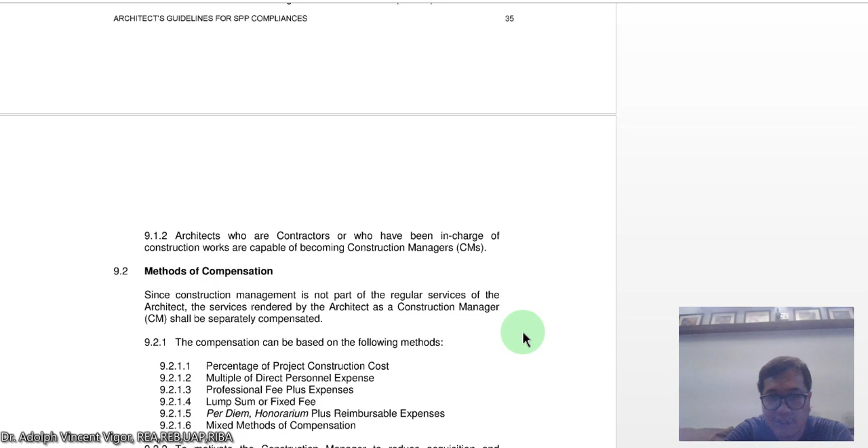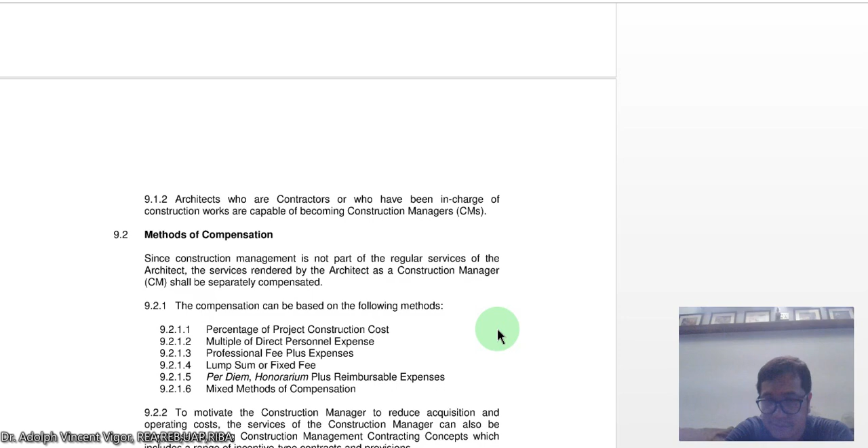For me. So managerial capabilities also could be learned if you already have a lot of experience. And preferably if you have a master's degree in management or a doctorate in management, it would help also. Then architects who are contractors or who have been in charge of construction works are capable of becoming construction managers. Of course, this is a given, because if you already have a lot of experience under your belt, then you're already capable of becoming a construction manager.

So what are the methods of compensation? Since construction management is not part of the regular services of the architect, the services rendered by the architect as a construction manager shall be separately compensated. So it means that since it's not part of the regular services, the services as a construction manager are to be compensated separately. The compensation is based on the following methods. The first is the percentage of the project construction cost, which is what we also do with the regular services.

Then multiple of direct personnel expense. Then professional fee plus expenses. We also have a lump sum or fixed fee, or a per diem honorarium plus reimbursable expense. And we could also do mixed methods of compensation. So it really depends on your agreement with the company or the owner how you're going to be paid if you're going to become a construction manager.

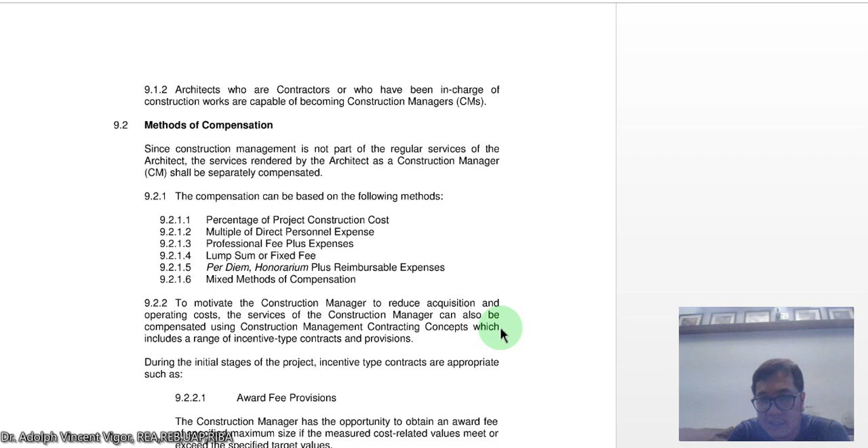So to motivate the construction manager to reduce acquisition and operating costs, the services of the construction manager can also be compensated using the construction management contracting concepts, which include a wide range of incentive type contracts and provisions. So these are the different provisions. During the initial stages of the project, incentive type contracts are appropriate. When you say initial stages, these are the early stages of the project. So there are two written here.

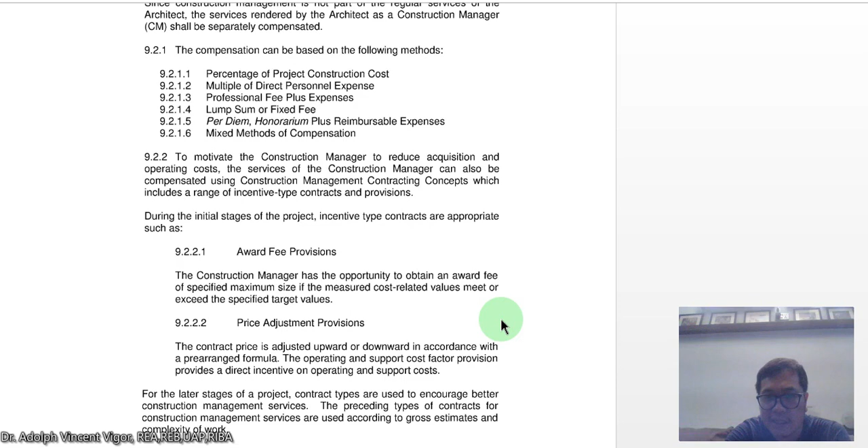The first one is award fee provisions. The construction manager has the opportunity to obtain an award fee of a specified maximum size if the measured cost-related values meet or exceed the specified target values. So that's the award fee provisions. The next is the price adjustment provisions. The contract price is adjusted upward or downward in accordance with the prearranged formula. So the operating and support cost factor provision provides a direct incentive on operating and support cost.

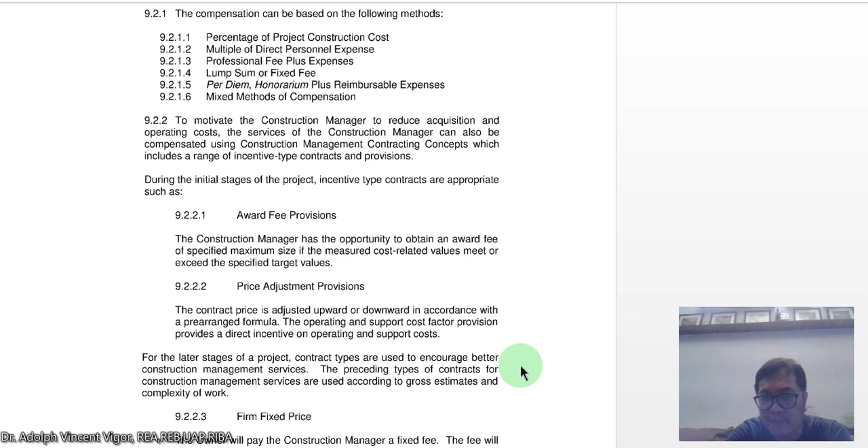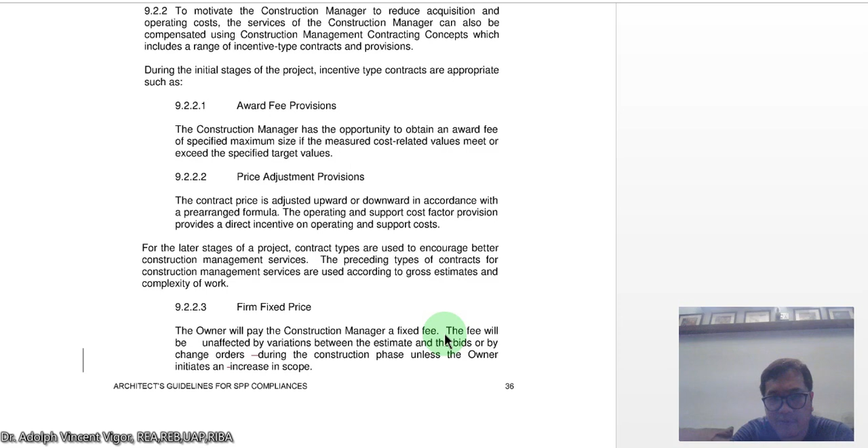Then for the later stages of a project, contract types are used to encourage better construction management services. So if you're going to enter already on the later stages of the project, these are the recommended fee provisions. The preceding types of contracts for construction management services are used according to gross estimates and complexity of work. It means that if a project becomes more complex, of course, the fee structure should be different.

So we have a firm fixed price, of which the owner will pay the construction manager a fixed fee. The fee will be unaffected by variations between the estimates and the bids or by change orders during the construction phase unless the owner initiates an increase in scope. For the first one, it only means that even if there are variations in the estimates or there are change orders that happen, unless there is a change in scope, your fee will not change. Hence, it is a firm fixed price.

The next is the fixed price incentive. In the fixed price incentive, the owner will pay the construction manager a fixed fee, which is adjusted according to the difference between the final allowable cost and the target cost. Next we have the cost plus incentive fee, or CPIF, or the cost plus adjusted fee: cost reimbursement type contracts with provisions for a fee that is adjusted by sharing formulas applied to the difference between the final allowable cost and the target cost.

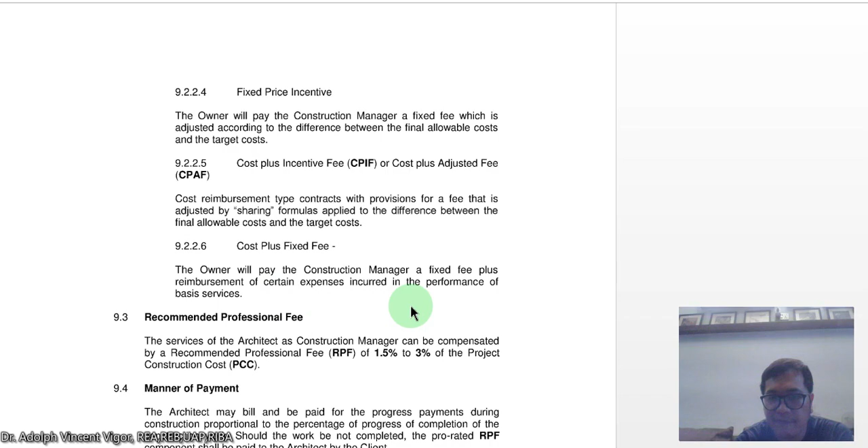Then, aside from that, we could also do a percentage approach for your fee as a construction manager, so we have here a recommended professional fee. The services of the architect as a construction manager can be compensated by a recommended professional fee, which is 1.5% to 3% of the project construction cost. So I think that's a decent amount of money if you multiply it by 3%. Of course, you only get the higher fee if the project is more complicated.

Then you have here the manner of payment. The architect may bill and be paid for progress payments during the construction proportional to the percentage of progress of completion of the construction work. Should the work not be completed, the prorated recommended professional fee component shall be paid to the architect by the client. In my own experience, guys, I think it's much better if you get paid according to the progress, because in that manner the client can also see that there's really improvement in the project, and for you, in terms of contract, you can get things more defined.

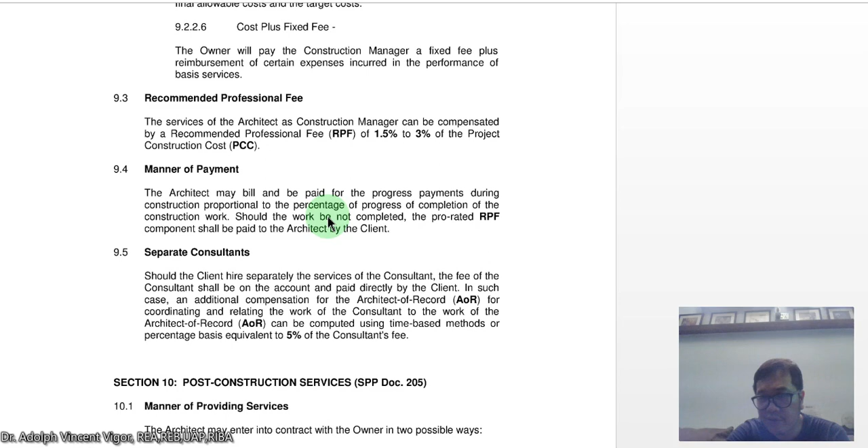Then you have separate consultants. I think this provision is present in everything that was discussed in the earlier SPPs or UAP documents. Should the client hire separately the services of the consultant, the fee of the consultant shall be on the account of and paid by the client directly. In such case, an additional compensation for the architect of record for coordinating and relating the work of the consultant to the work of the architect of record can be computed using time-based methods or a percentage basis equivalent to 5% of the consultant's fee. So if the client hires separate consultants, you get a coordination fee of 5%.

Then you have SPP document 205. I guess I just discussed this. This is just short. You have the post-construction services.

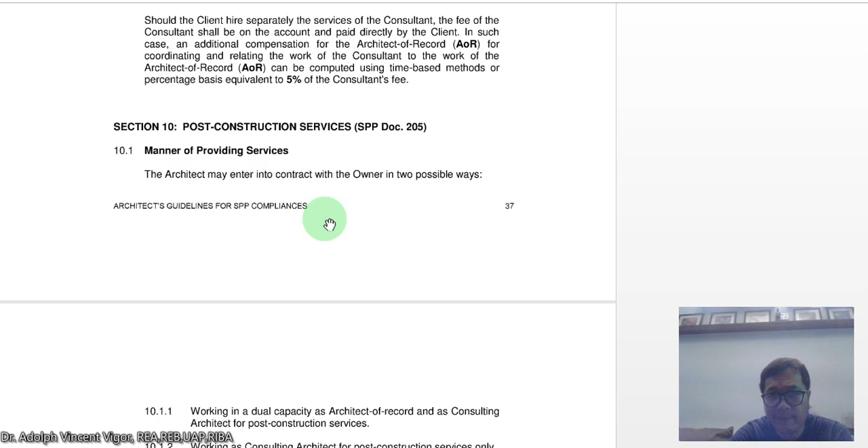So there are two ways you could engage the owner with the post-construction service. The first is that you are the architect of record and the consulting architect for post-construction service. The second is that you're only working as a consulting architect for post-construction services only, which means that in the first option, you are both the designer of the project and then you also get hired for the post-construction, which is already after the construction, hence post.

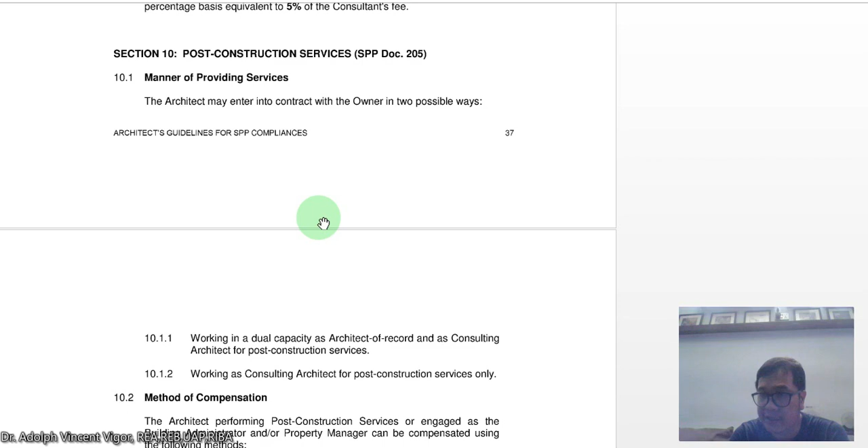And also, you are not involved in the design of the structure, but you get hired by the owner as a consulting architect for the post-construction services only. So it has diverse methods of compensation also. So the architect performing the post-construction service or engaged as the building administrator and/or property manager can be compensated using the following methods.

So the first is the value pricing or percentage of gross rentals, maintenance, and security fees. Okay, so this is just simple percentage. Second, this is the most common. You have the monthly salary or fee. The third is the multiple of direct personnel expense. Then we have here the retainer plus reimbursable expenses. Then you have the professional fee plus expenses. So let's differentiate. I already discussed the first two.

So when you say multiple of direct personnel expense, you bill the client according to your expenses of the project. Then you have a multiplier for that, which is agreed by both of you. So then the result would be your compensation. Then we have a retainer plus reimbursable expense. So in my experience, retainer means that the client pays you a fixed fee per month. Then if you have expenses that are reimbursable, that's on top of your fee already.

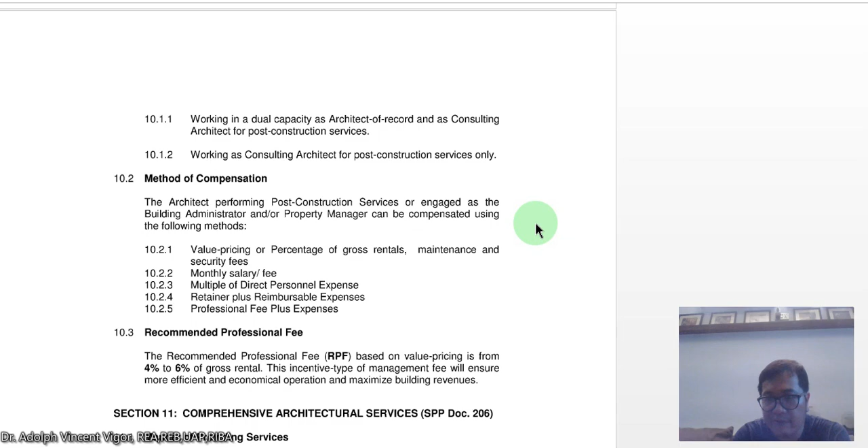Okay, so I think now we've already discussed SPP Doc 205 and SPP Doc 204-B. So just remember, class, that if you want to engage in the services, you really need to increase your experience. Your apprenticeship is good. That's 2 years, but it's not enough. You have to experience different building types, and then you have to go to graduate school. That's my own thing. And then you really have to observe what's happening on the site so that you can make sound decisions someday when you're already engaging in these types of services as an architect.